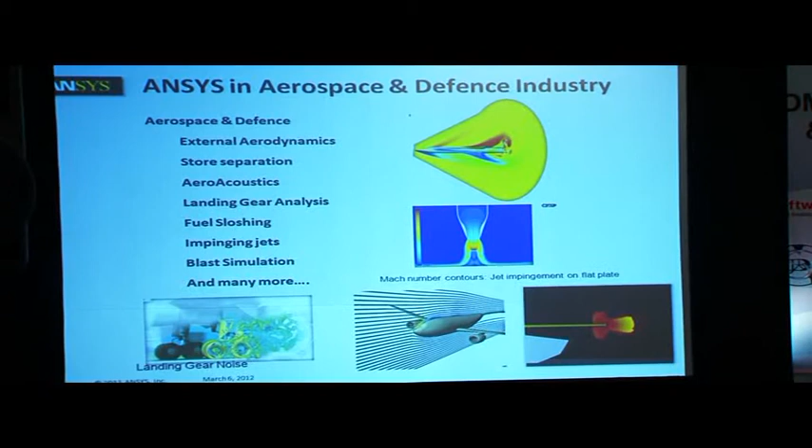So a brief background on what ANSYS can do in different physics. In aerospace industry, we cover external aerodynamics, store separation, aeroacoustics, landing gear analysis, fuel sloshing problems, impinging jets, blast simulations, and many more. I'm not listing all the applications, just giving an idea of what ANSYS is capable of in aerospace industry.

In automotive industry, we can do external aerodynamics, noise modeling, aeroacoustic sound modeling, underhood thermal management, component modeling, impact analysis, fatigue, and many more.

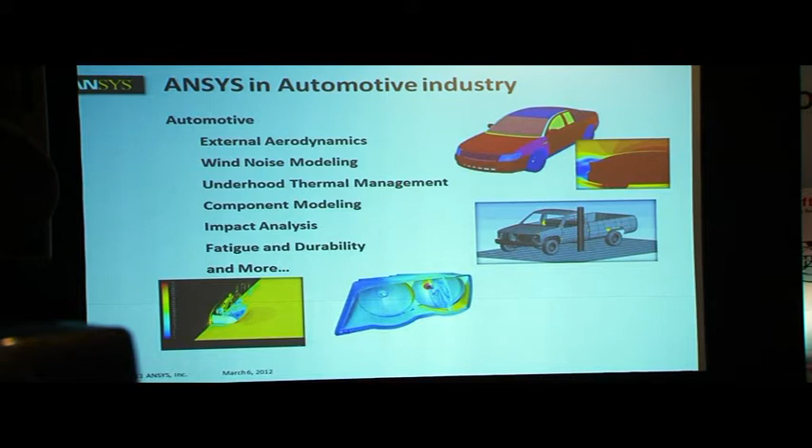In turbomachinery, you can model combustion aspects, loss prediction and performance, torque prediction, cavitation, crack propagation, and many more. These are all analyses we are performing individually at each physics.

During my masters, the professor who taught fluid dynamics said the idea of doing all this fluid dynamics is to capture two things: the forces and moments acting on the body, the resulting pressure losses, and the heat transfer effects. If you're able to do that, the fluid dynamics study you're performing, the reason you're performing the analysis, is pretty much well done.

But from the designer's perspective of a product, what is this going to give as input? Fine, I know the pressure loss for this configuration, I know the force acting on this particular surface. What next? At the end of the day, I have to build a component.

So these are the fluid forces acting on the body - can the structure withstand these forces? Can a better angle or geometry configuration minimize my pressure losses? It boils down to performing a structural analysis, because at the end of the day I'm going to build a structure. So how do I couple the information from a fluid analysis to a structural analysis? Does it make a real difference, or can I just assume approximate forces and design my structure?

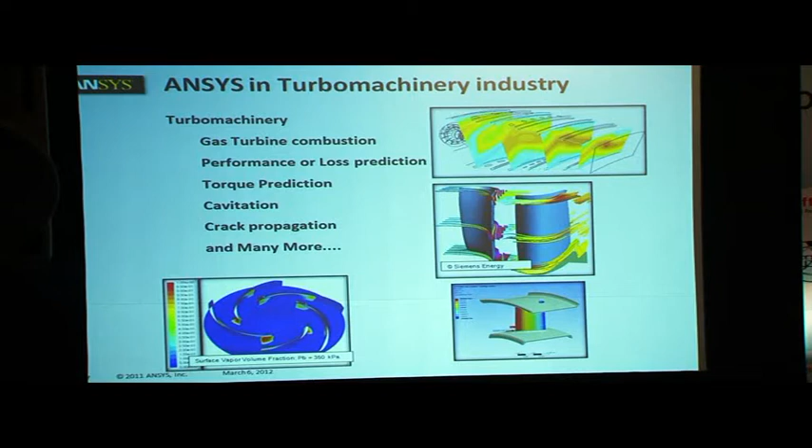Extending that concept, we build upon what we call multiphysics. Your product will be much more accurate and reliable if I know the exact force distribution acting on the surface, rather than approximating it, and then design my structural component based on the actual forces acting on that component.

So why do you need to consider multiphysics? You can't afford to ignore it, because the real world is much more complex than what we think it might be.

The design depends upon coupled physics phenomena. Let's say you're solving for a motor problem. You would want to see the heat sources generated because of the magnetic forces, and those heat forces coupled along with the fluid flow might result in a different heat transfer phenomena which is going to affect your structural design. Is that important in your analysis?

Maybe if you're taking the factor of safety to a larger value, it might not be important. But in today's competitive world, each and every step towards minimizing weight and minimizing cost is very much well taken and is the need of the hour. So you're faced with small error margins or stack-up effects, and physical testing is too costly to consider the effect of all these phenomena. So in all these cases, it becomes pretty much relevant that you perform multiphysics.

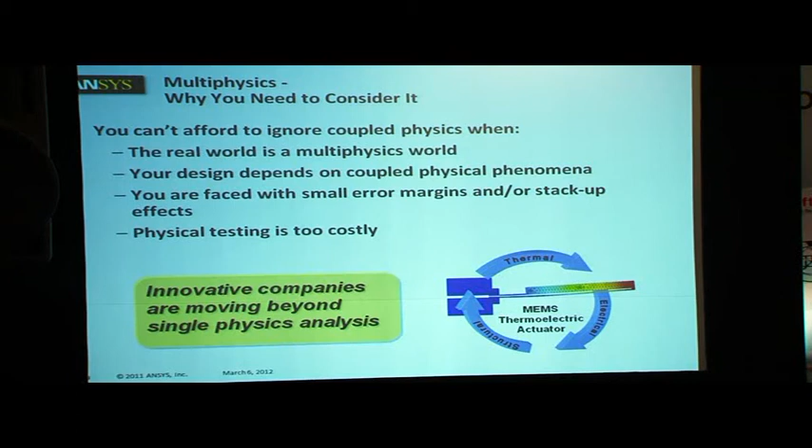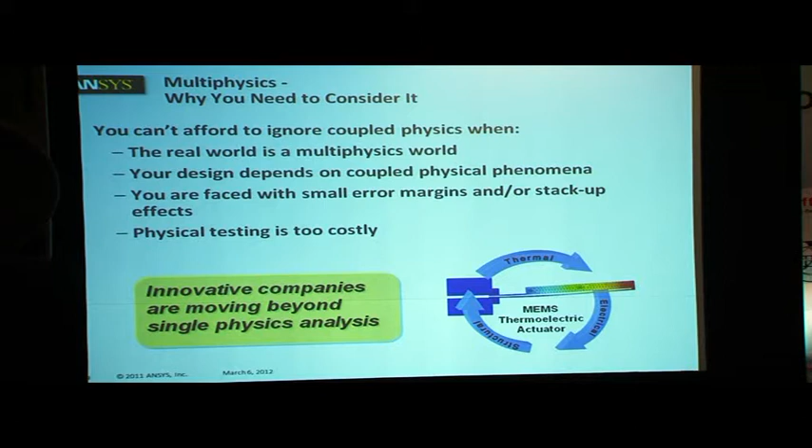So innovative companies are moving beyond single physics analysis. Probably, as we discussed this morning, in 5 or 10 years down the line, there's not going to be any distinction between what is called CFD analysis or what is called FEA analysis. It might end up being called engineering analysis, altogether coming into a single framework.

So in today's context, we have fluid dynamics problems where the idea is to get a solid temperature if you are solving for a thermal analysis, and the quantities of interest would be the flow field, the pressure forces, or the convective heat transfer coefficient. And in the structural framework, we'll be talking about deformations, stress strain, maximum deformations and stuff like that.

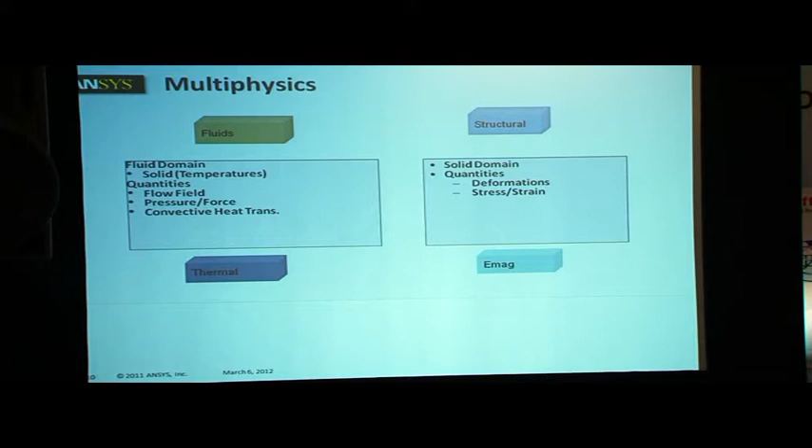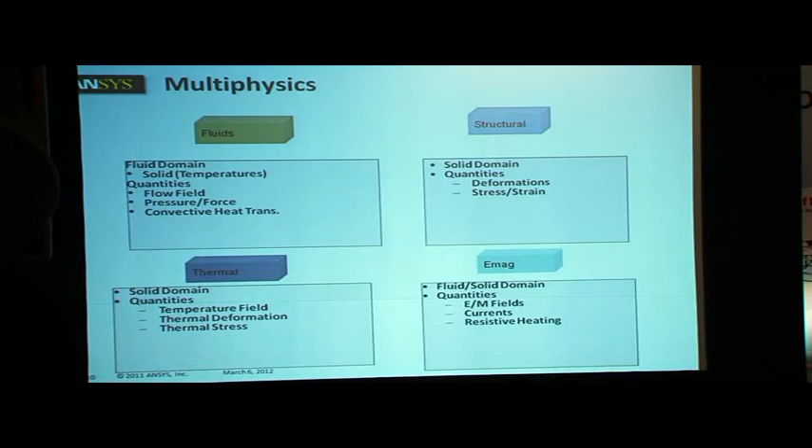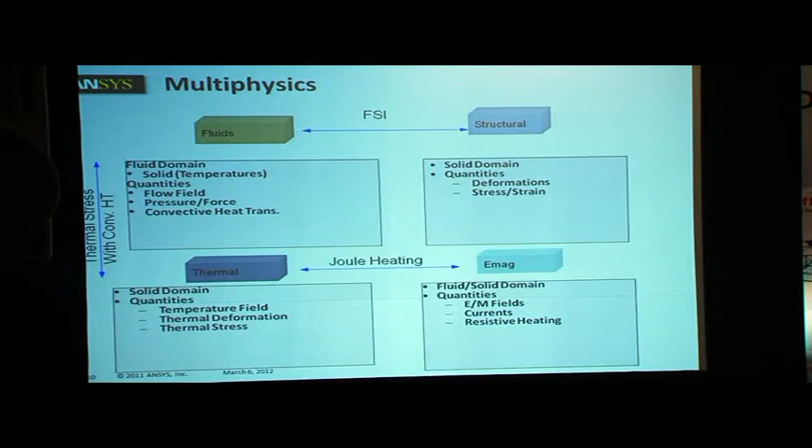In the context of thermal analysis, we talk about the temperature field within the solid, the resulting thermal stress, and in the EMAG field, we'll be talking about electromagnetic fields and currents, the resistive heating. But coupling these physics in an intermittent fashion is what we call an FSI analysis, the fluid structure interaction, where we couple the fluid and structural analysis, and we couple the thermal and EMAG analysis for Joule heating. So what are the technologies we have today to do this multiphysics analysis?

There are two methodologies: one is load transfer, and the other is direct coupling. With load transfer, I'm going to solve individual physics first — solve a CFD simulation, solve a structural simulation — and then transfer the resulting forces from the fluid dynamic solution to the structural solution to get the deformations based upon the fluid forces. Then I may transfer the resulting deformations back to my fluid analysis to see how the flow field changes with respect to the deformation obtained.

Whereas in direct coupling, you do not do a load transfer. You solve all these things in a single set of constraint equations. The equations you build up are not decomposed by different physics, but composed of a single vector. So it's an element-level coupling of highly coupled physics — a single model and mesh where all the relevant equations will be solved in one go.

So ANSYS software utilizes both these simulation techniques. For FSI analysis, the fluid structure interaction analysis, we're going to transfer the loads, and for coupled field analysis, we're going to use what is called direct coupling.

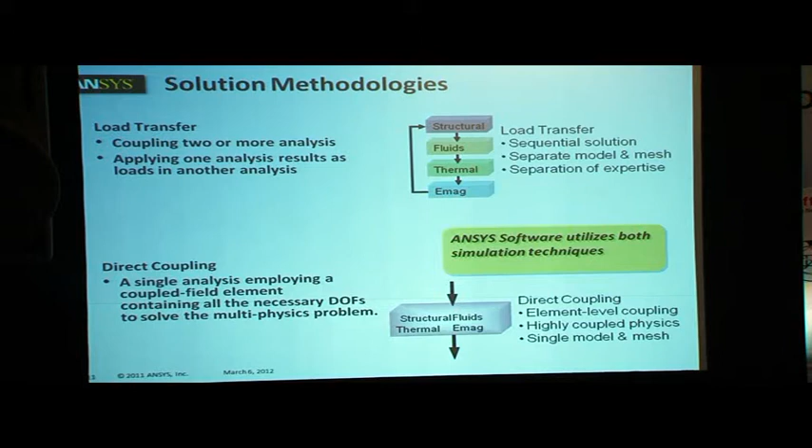Built upon this technology, ANSYS has always been looking into extending and increasing the user's ability to model real physics. With that framework in mind, the first version of Workbench came into picture, essentially making the user much more comfortable in increasing the usability levels to couple these data transfers.

I recall about 4-5 years back, if I had to transfer a fluid solution to mechanical solutions, I had to follow a lot of methodologies and steps in importing the proper surfaces, doing the mapping of the fluid forces onto the mechanical surfaces, taking it back to the structural solution and doing the structural analysis. But with the framework of Workbench, you can do it by click of a button.

That's what we are talking about in terms of extending the usability of the tool. In a single project page, we can manage all the required analysis, be it structural analysis or fluid analysis, and then couple the data from fluid analysis to, say, a structural analysis.

So you've got a geometry, and then you've got a conjugate heat transfer mesh, you've got a CFD solution, and then you're passing the CFD solution to structural analysis for thermal loads, then passing the pressure loads for the deformation analysis, and calculating the thermal stress solution. All these things in a single framework.

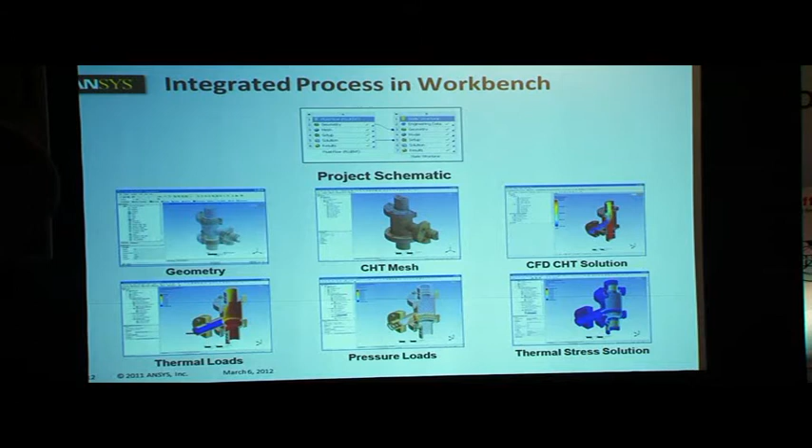In earlier ways, you might have a geometry built up somewhere, then you might be doing a fluid flow, a structural analysis, a modal analysis, and then a pre-stress modal analysis. But with the framework of Workbench, you can do all these things in a single project schematic.

What you've got to do is connect one solution to the setup of a different physics, and then specify the required surfaces where you would want to transfer the data. That's all you have to do.

As an example, we've got what is called piezoelectric capability - it's the coupling of the structural and electric fields. What you're seeing here is an example of a piezoelectric fan, where the fields you're solving for are structural and electric.

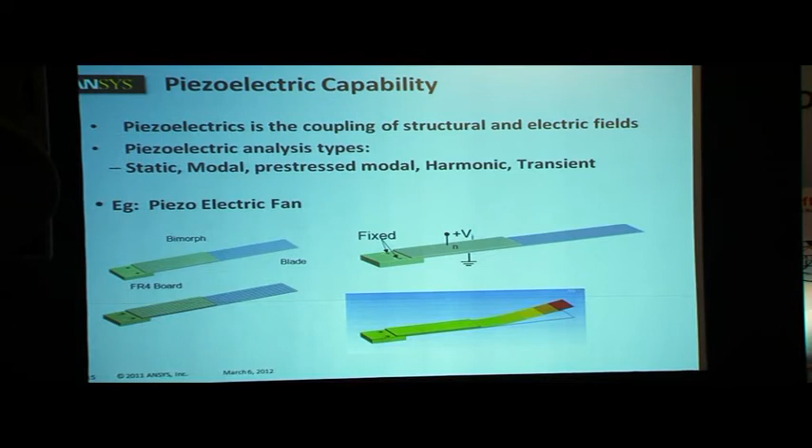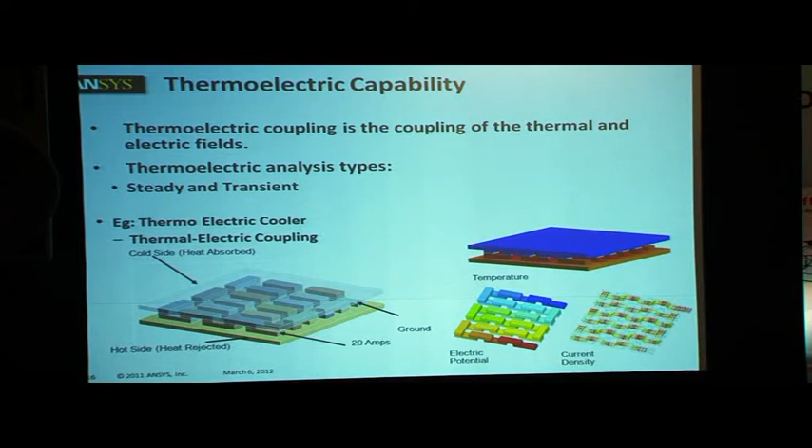Then there's thermoelectric coupling, where you're actually calculating the EMAG forces and coupling with the thermal analysis for a thermoelectric effect, for example a thermoelectric cooler. And structural thermal electric coupling, where your structure is going to deform because of the thermal stresses induced, the thermal data being generated because of the electrical sources present in the domain.

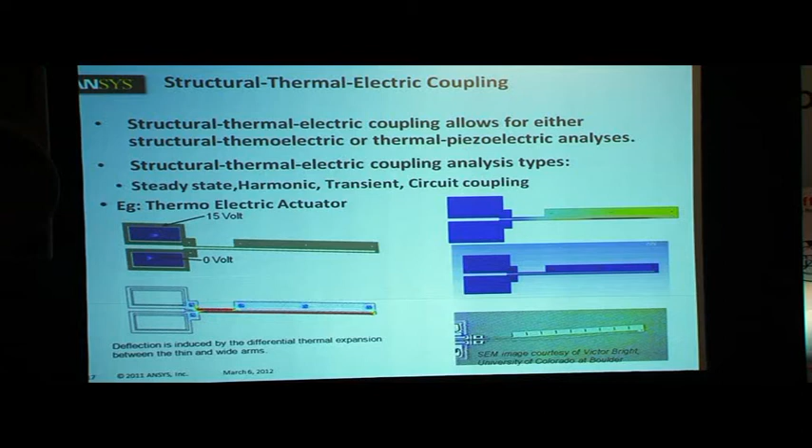So far what we are doing is one step ahead of the competition with respect to solving multi-physics problems. Going forward and elevating the process, what we are coming up with in R14 is called system coupling. System coupling facilitates simulations that require tightly integrated coupling of analysis systems, meaning you can couple any system to any system using system coupling.

You might have a transient structural analysis and fluid flow analysis, bringing these two systems into the system coupling analysis. Tomorrow you might have an EMAG analysis, fluid analysis, and structural analysis, bringing all three into system coupling and defining the coupling parameters and the data that needs to be exchanged. System coupling is going to be a generic interface where data from end-to-end systems and surfaces is mapped and transferred.

As of now at R14, system coupling is capable of doing Fluent and ANSYS Mechanical coupling in one-way and two-way transient fluid structure interaction problems.

Now, what we are saying is, fine, I've got a problem and I'm solving multi-physics - I'm having my forces coming from the fluid system and transferring them onto structural for doing structural analysis. Having said that, I am one step ahead of actually modeling my simulation more accurately. But then I really don't know what's going to happen if I change my mass flow rate, my inlet diameter, or my thickness. I would want an optimal solution which can give me the minimal weight of the component for the analysis I'm looking at.

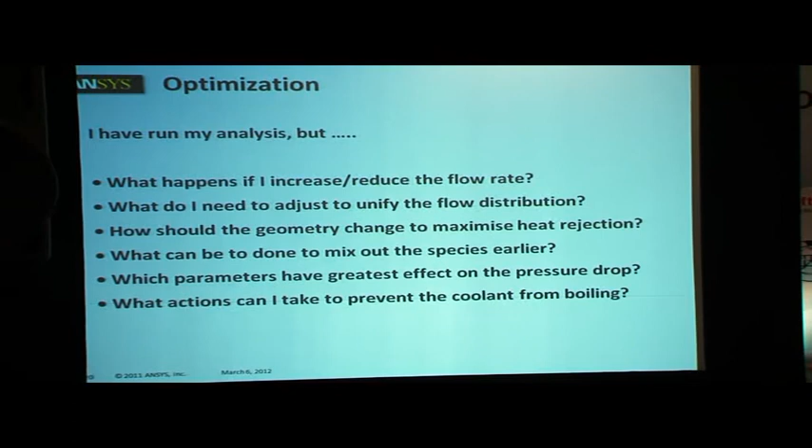I might want to have a specific mass flow inlet, a specific mass flow rate, and I would want to have a minimum thickness of the structure for the minimal weight. We can do that. That's what we are actually aiming at. So for example, scenarios like what happens if I increase or reduce the mass flow rate, how should the geometry change to maximize heat rejection, what can be done to mix out the species earlier, stuff like that.

So what are the optimization methods we have today? The fact that we have not one but more than one optimization method to cater to various needs of the industry explains that ANSYS has been focusing on optimization as one of the mainstream applications. We've got what is called an adjoint solver, predominantly in Fluent. We have what is called a mesh morpher or shape optimizer. We have what is called a design exploration and goal driven optimization tools.

Coming to adjoint solver, it's a high level system view of a conventional flow solver. You're going to solve the adjoint Navier-Stokes equations, the adjoint form of the Navier-Stokes equations, and then solve the adjoint equations to get the effect of different boundary conditions upon your solution.

So the inputs would be the typical inputs for what we do in a CFD analysis, like the boundary mesh, the interior mesh, material properties and stuff like that, and the outputs will be the contour plot in terms of flow field physics, then scalar values like lift, drag and total pressure drop. Typically this is what we get out of a flow solver.

What we get out of the adjoint solver is, say I would want to minimize the drag. So what are the factors affecting the drag? By reducing which parameter can I minimize the drag? That is what is being addressed by the adjoint solver. So you can take one engineering parameter which is the crux of your problem and see how that parameter is being influenced by various input parameters.

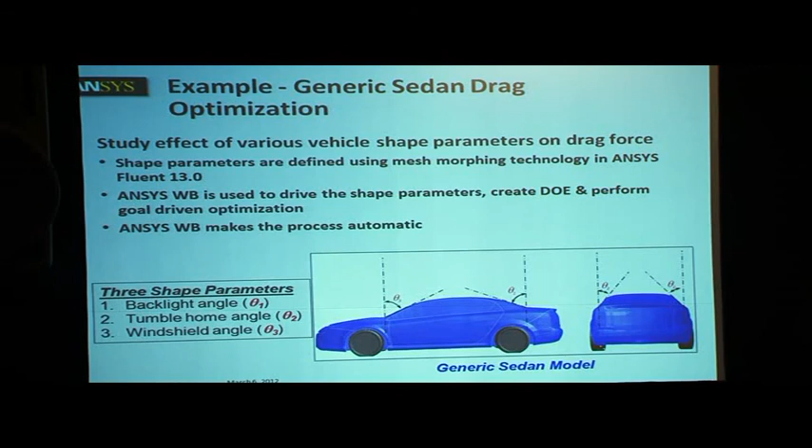What is the angle that the windshield is going to make? What is the angle that the back shield is going to make, and the side angles, so that it gives you minimal drag. So you're going to define these as parameters and run various analyses for those parameters.

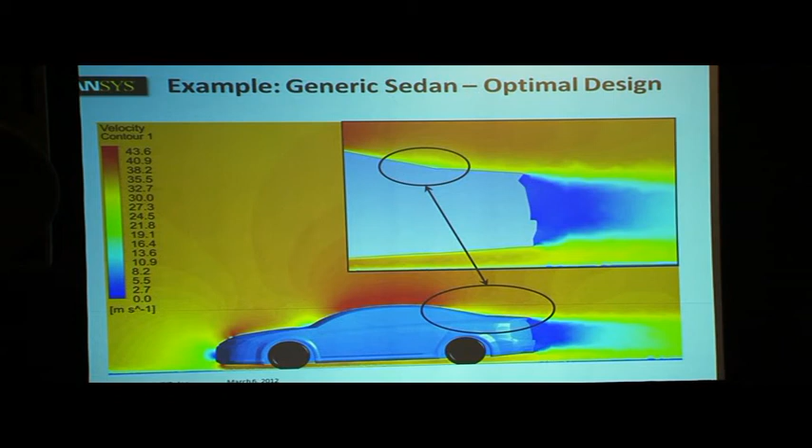So this is the baseline design where you're getting a certain flow field in the backside window. This is the worst region where you're seeing a lot of backflow, and this is the optimal design which minimizes the backflow and hence helps you in the drag behavior.

Now fine, I got an optimized solution. I'm looking at a solution which gives me the optimal result, fine, but then I don't have a week to solve the problem - I got only 2 days to solve the problem. Can you help me with that?

So HPC is the answer. As always, ANSYS has been spending and investing in R&D efforts of HPC for quite a long time, and it will continue to do so.

So enabling HPC adds tremendous value to your use of simulation while enabling insight and enabling productivity. It's all about getting better insight, not only getting better insight, but getting it quicker, right? So HPC enables high fidelity, design exploration and optimization at a much faster rate.

The simulation that would take to perform probably in a week's time, you may be able to complete in a couple of days' time.

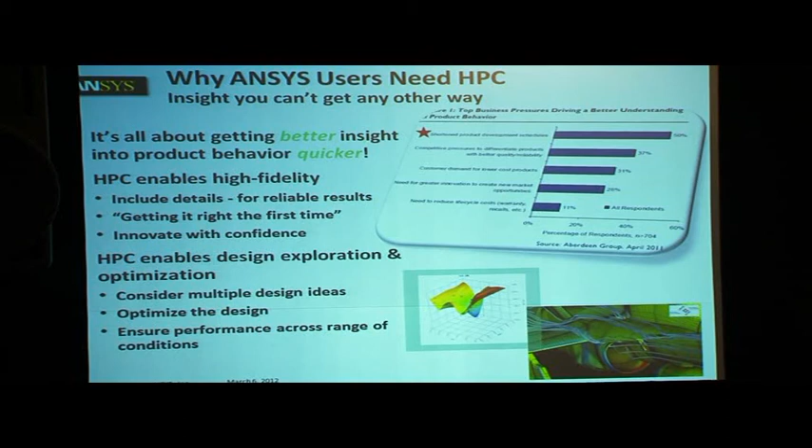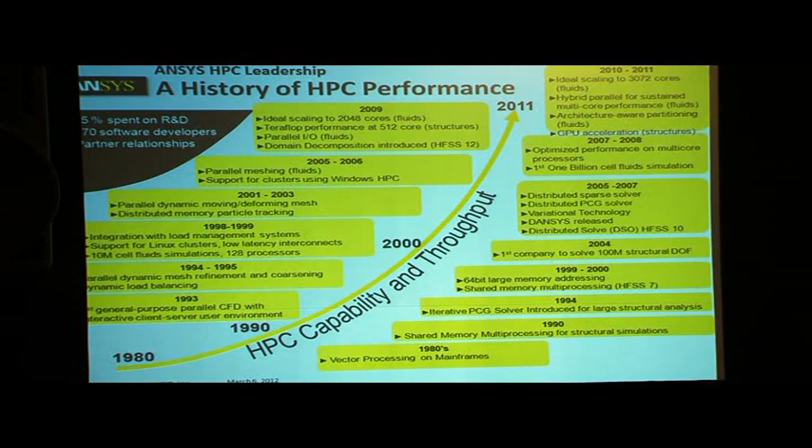So if you look at the trend and the investment that ANSYS has made over a period of years, it's continuous. It's not that ANSYS stopped investing in HPC at one particular point of time and then picked up later seeing the trend. ANSYS has been investing in HPC continuously over a period of time.

With respect to the newly available hardware and improvements in hardware, ANSYS has been trying to keep itself up to date with respect to the available hardware, so that the solvers can get the best out of the available hardware.